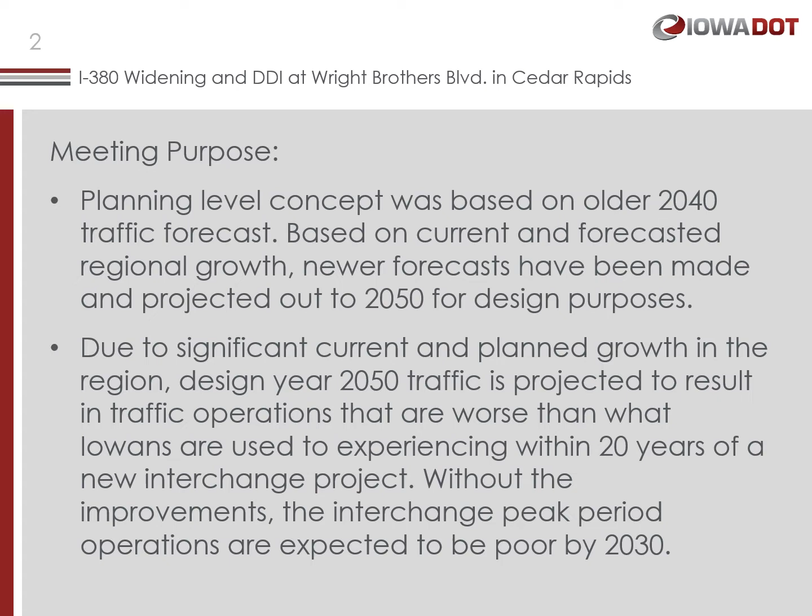This presentation will provide project information, updated traffic forecast information, design reassessment considerations, and recommendations.

Wright Brothers Boulevard interchange with I-380 is proposed to be reconstructed as a diverging diamond interchange, referred to as a DDI for short. For this interchange type, side road traffic crosses to the left side of the road at signalized intersections. DDIs decrease vehicle conflict points by almost half and remove left turns across oncoming traffic. A DDI can increase interchange capacity, efficiency, and safety.

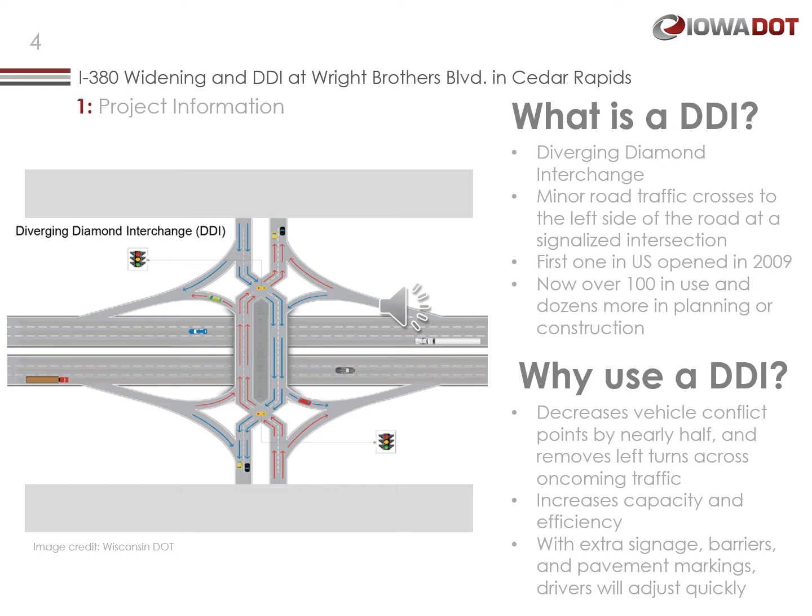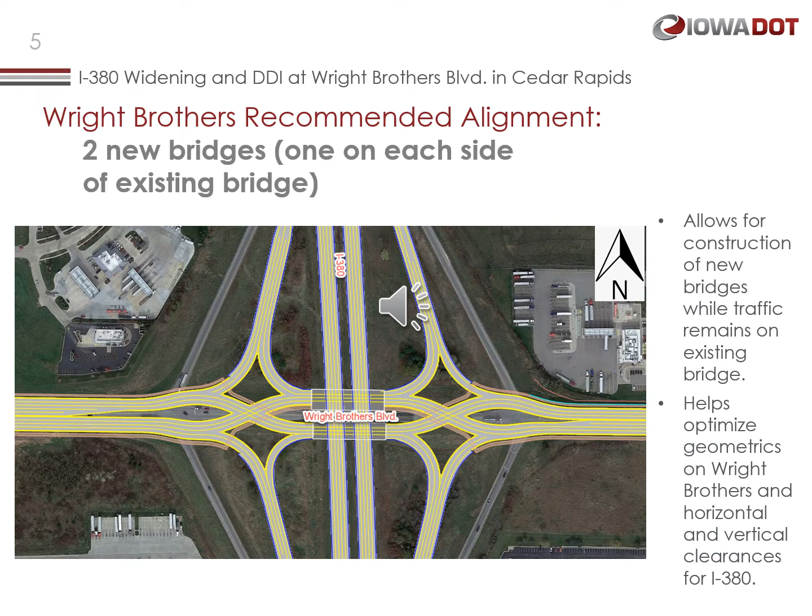The proposed new DDI at Wright Brothers Boulevard over I-380 will have two new bridges. They will be constructed on each side of the existing bridge to help maintain existing traffic during construction. Once the new bridges are ready, the old bridge will be removed.

Due to new and projected industrial, commercial, and housing developments in the region, in 2021 the City of Cedar Rapids facilitated a Southwest area traffic study to reassess future transportation needs.

In the fall of 2021, the city worked with the DOT on an update to the regional traffic model that includes sections of I-380 and Wright Brothers Boulevard Southwest. The design year for the I-380 and Wright Brothers Boulevard interchange improvements was selected to be 2050. Traffic projections were made out to this design year.

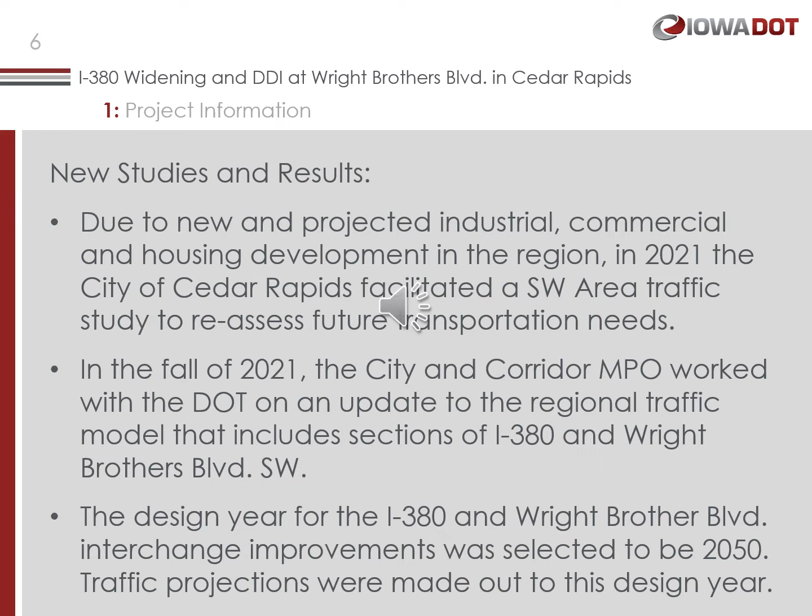The new traffic forecasts show more aggressive traffic growth at the Wright Brothers Boulevard interchange than the prior forecast, larger than what Iowans are used to seeing. The new traffic forecasts justify additional lanes in the interchange and auxiliary lanes on I-380 in many locations between 120th Street and US 30.

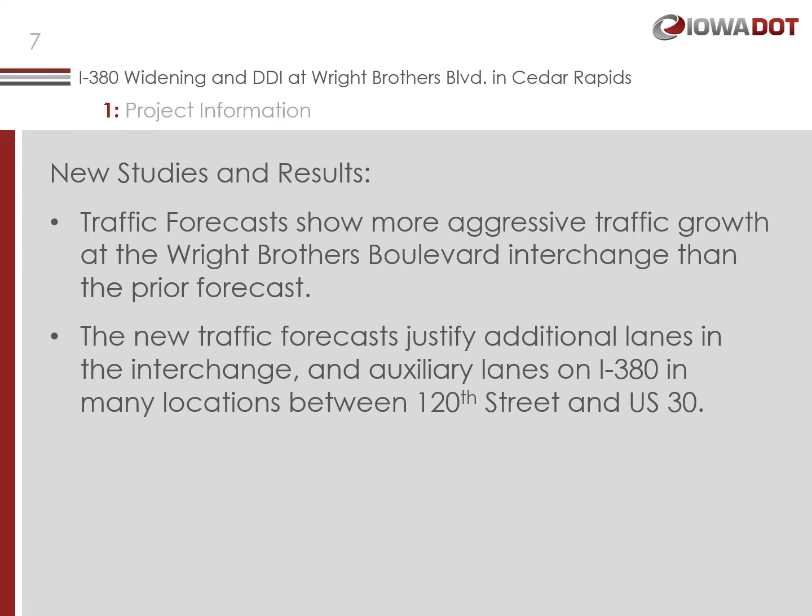The projected operations in year 2050 show congestion along Wright Brothers Boulevard Southwest and along I-380, mostly in the northbound direction between Wright Brothers Boulevard and US 30. Compared to doing nothing at the Wright Brothers Boulevard interchange, which means keeping the existing two-lane bridge over I-380 and the existing ramps, the proposed interchange improvements move the congested operations out approximately 20 years, from 2030 to 2050.

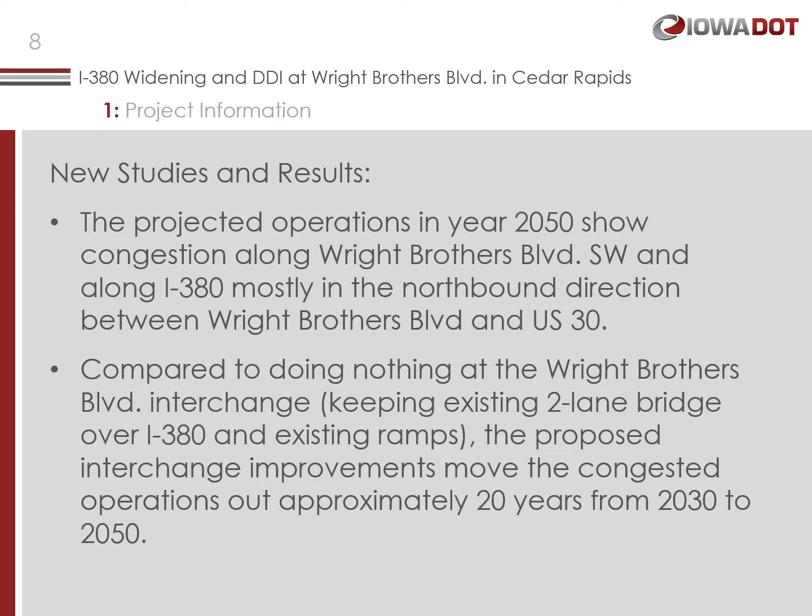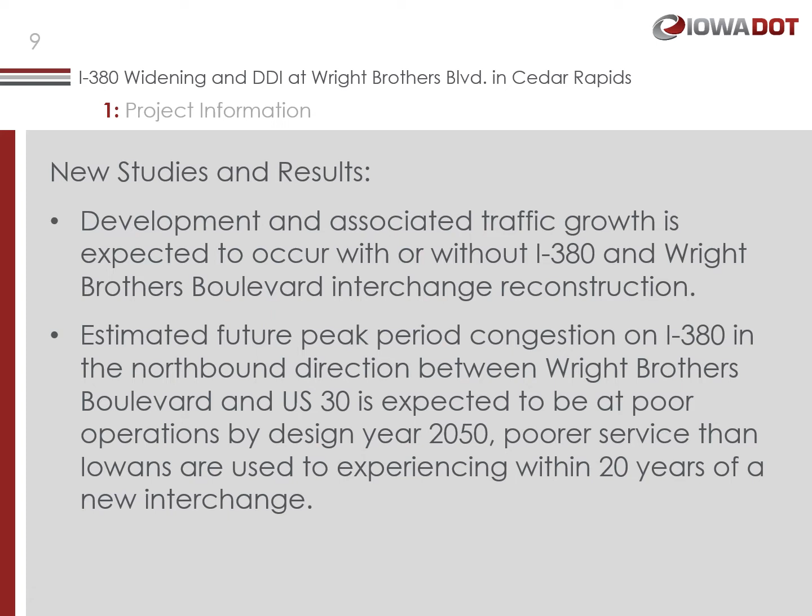Development and associated traffic growth is expected to occur with or without I-380 and Wright Brothers Boulevard interchange reconstruction. Estimated future peak period congestion on I-380 in the northbound direction between Wright Brothers Boulevard and US 30 is expected to be at poor operations by design year 2050, poorer service than Iowans are used to experiencing within 20 years of a new interchange.

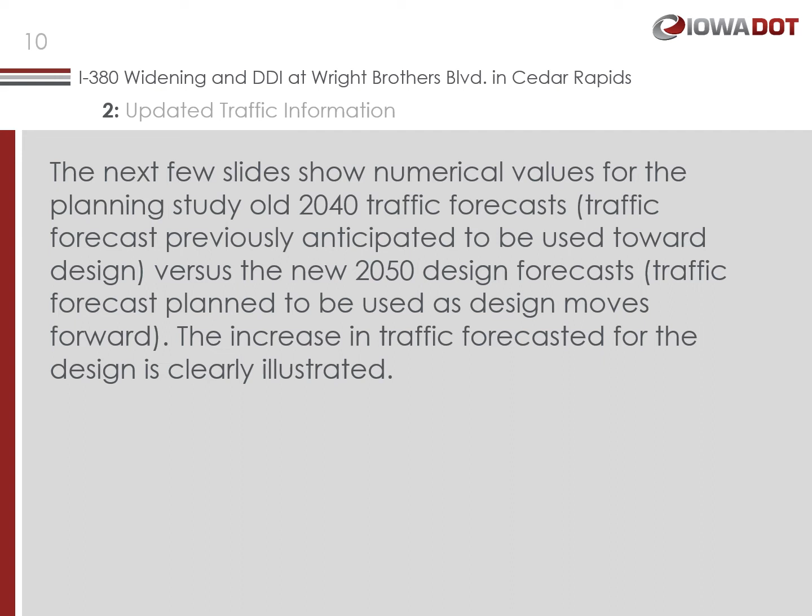Average annual daily traffic, AADT for short, estimates in new design year 2050 are much higher than the prior 2040 planning estimates.

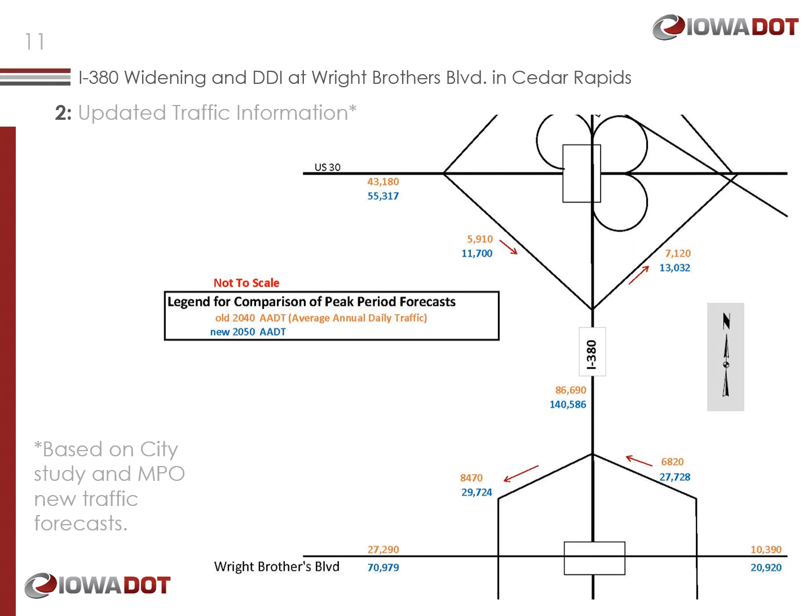AADT is the total for both directions of travel. For example, on I-380 between Wright Brothers Boulevard and US 30, the new 2050 design AADT is 140,586 vehicles, whereas the previous 2040 planning level AADT was 86,690 vehicles.

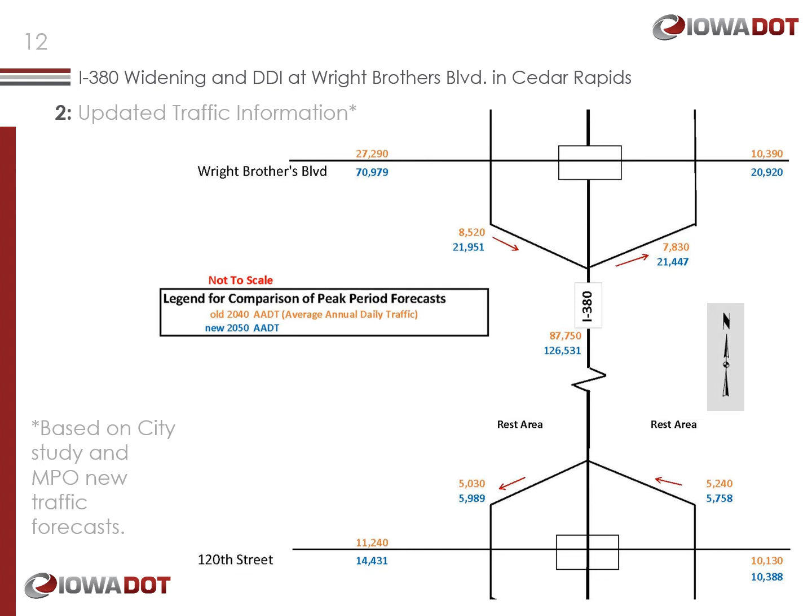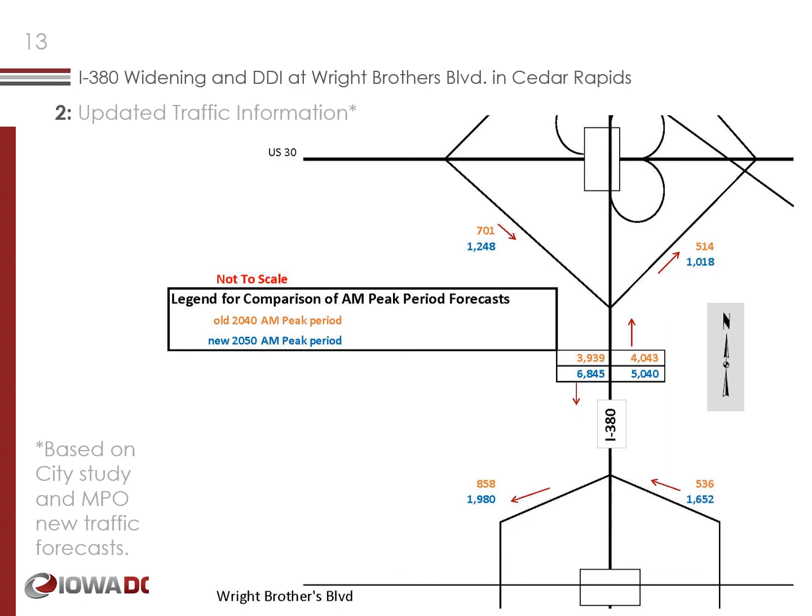Slides 13 and 14 illustrate the AM peak period forecast projections of the old 2040 planning forecast compared to the new 2050 design forecast. Data is shown for each direction of travel. For example, for I-380 northbound between Wright Brothers Boulevard and US 30, the previous 2040 planning peak period forecast was 4,043 vehicles, and the new 2050 design forecast is 5,040 vehicles per hour.

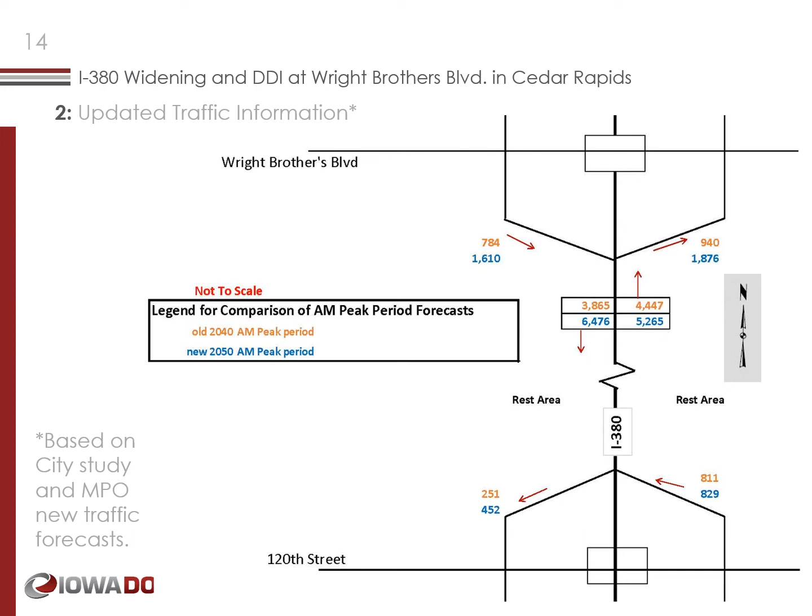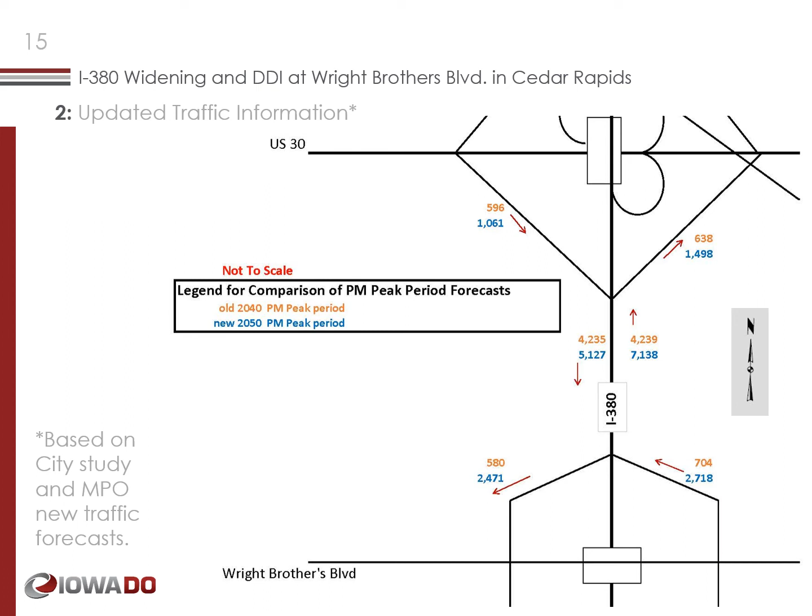Slides 15 and 16 illustrate the PM peak period forecast projections of the old 2040 planning forecast compared to the new 2050 design forecast. Data is shown for each direction of travel. For example, for I-380 northbound between Wright Brothers Boulevard and US 30, the previous 2040 planning peak period forecast was 4,239 vehicles per hour, and the new 2050 design forecast is 7,138 vehicles per hour.

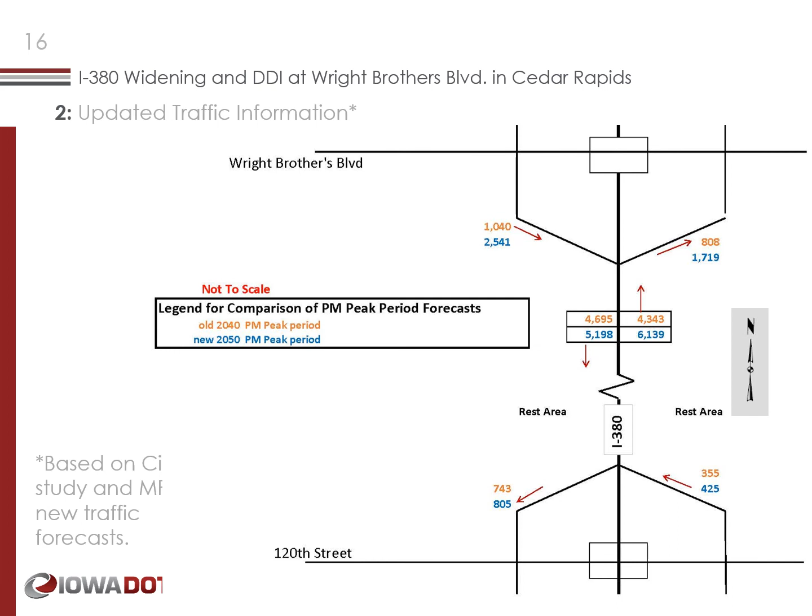I-380 mainline operations were assessed with the new 2050 traffic forecast. Auxiliary lanes were recommended in most locations and are proposed to be added. The following figures illustrate the anticipated speeds and delays along I-380 during peak periods in 2050.

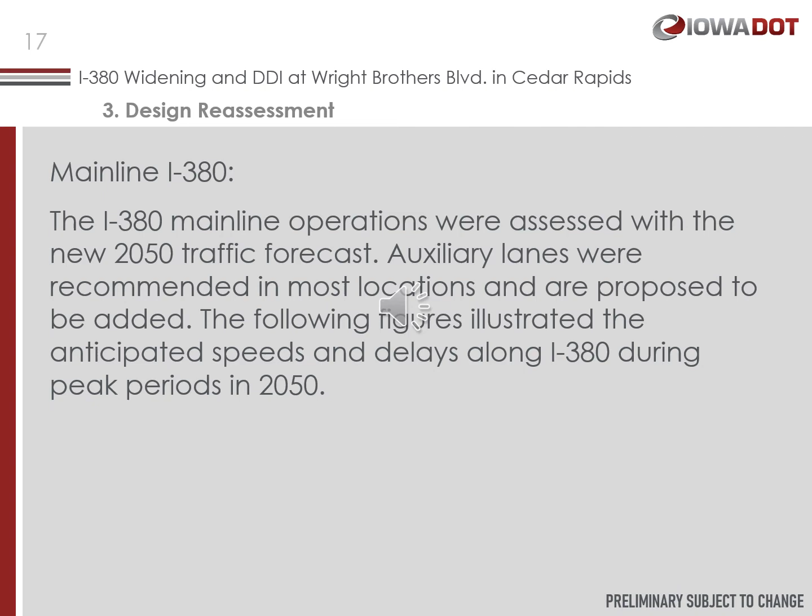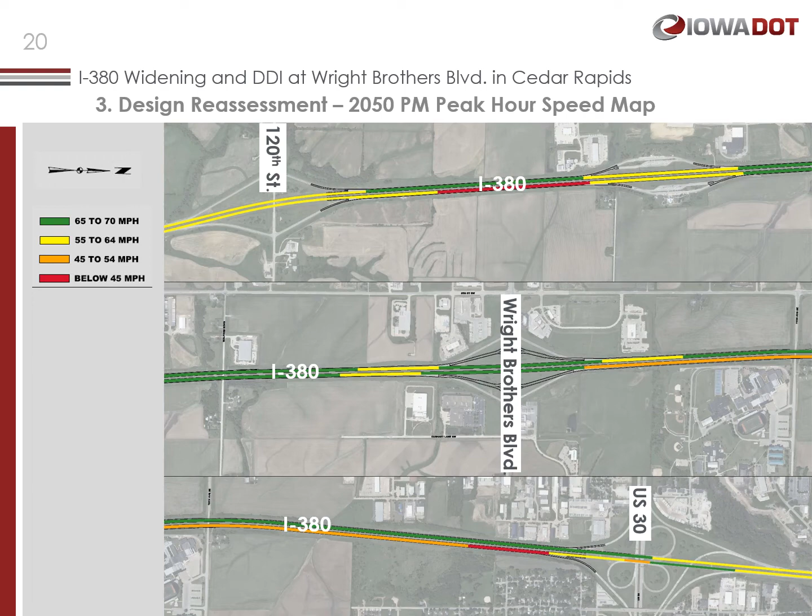This slide illustrates future year 2050 estimated traffic speeds during PM peak hour traffic. The left side of the page illustrates travel time along sections of I-380 during the AM peak hour if no improvements are made. The right side illustrates travel times along I-380 with the proposed improvements.

The left side of the page illustrates travel time along sections of I-380 during the PM peak hour if no improvements are made. The right side illustrates travel times along I-380 with the proposed improvements.

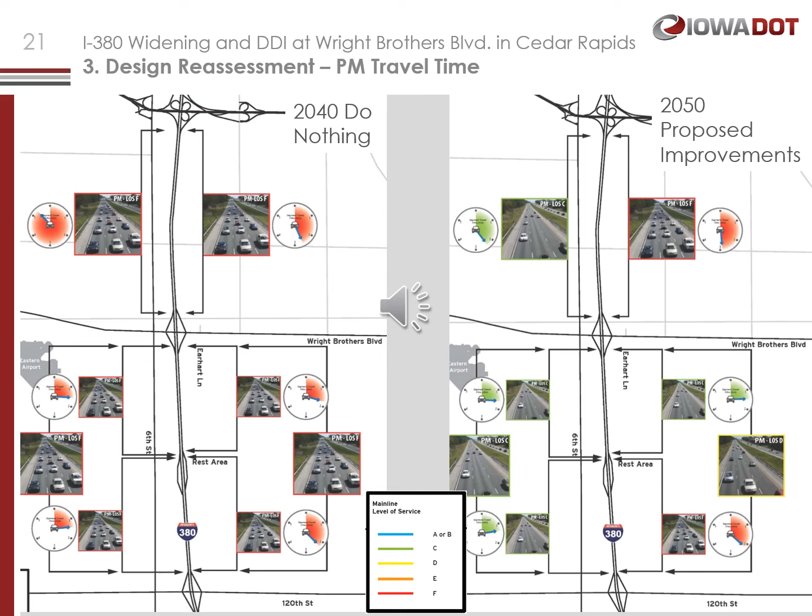With the new traffic forecast showing much greater traffic for the new selected 2050 design year, the interchange type and geometrics were reassessed. The next two figures illustrate changes made between the planning concept that used the old 2040 traffic forecast and the current design concept that uses the new 2050 traffic forecast.

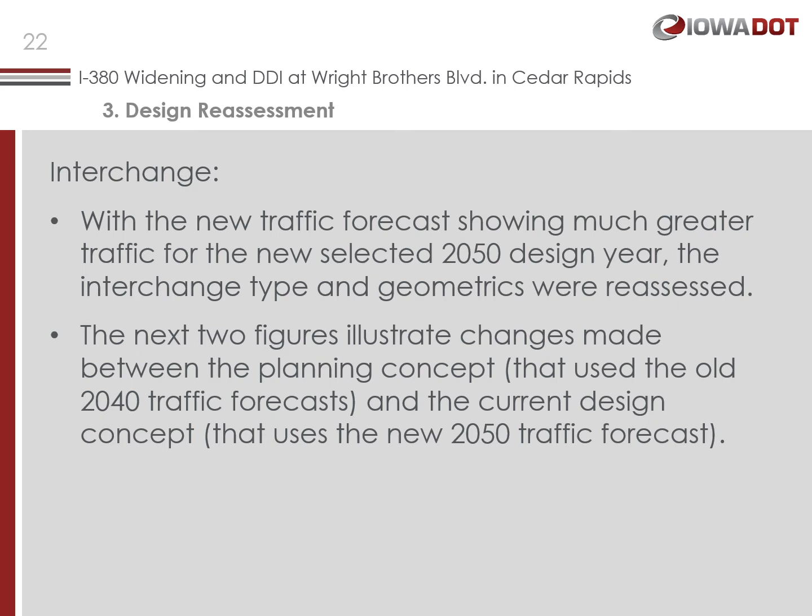Prior planning level concept layout of the DDI. Note 4 through lanes on Wright Brothers Boulevard.

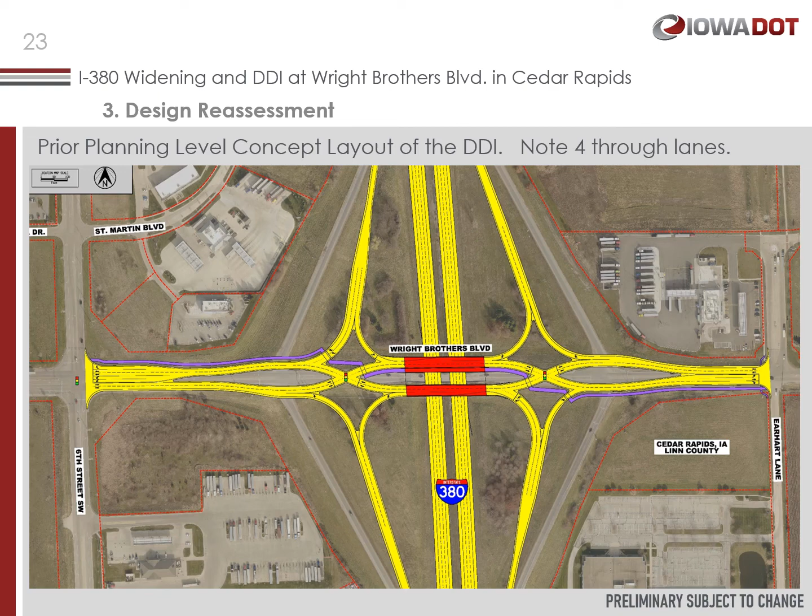Present design level concept layout of the DDI showing 6 proposed through lanes on Wright Brothers Boulevard, additional turning lanes, and additional ramp capacity.

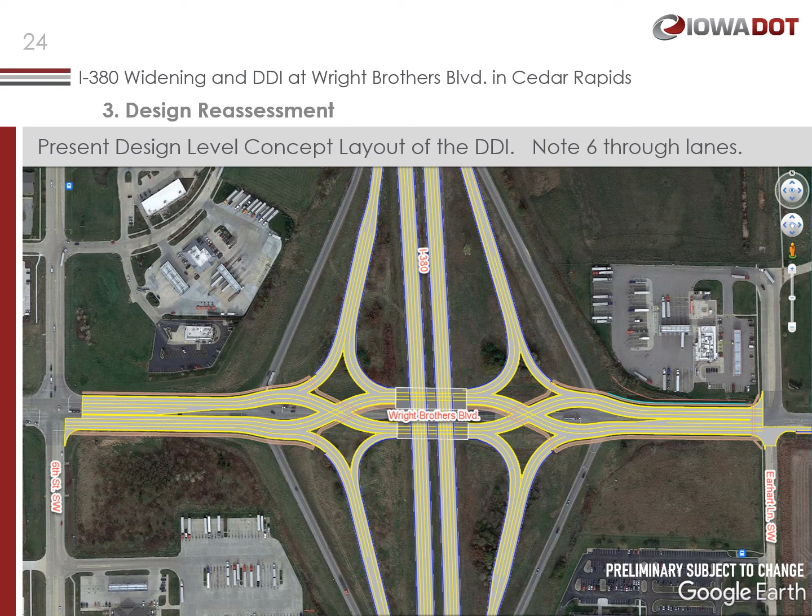The projected 2050 operations along Wright Brothers Boulevard Southwest show congestion in the peak periods and indicate that several signal cycles may be required for drivers to get through the traffic signals during these periods.

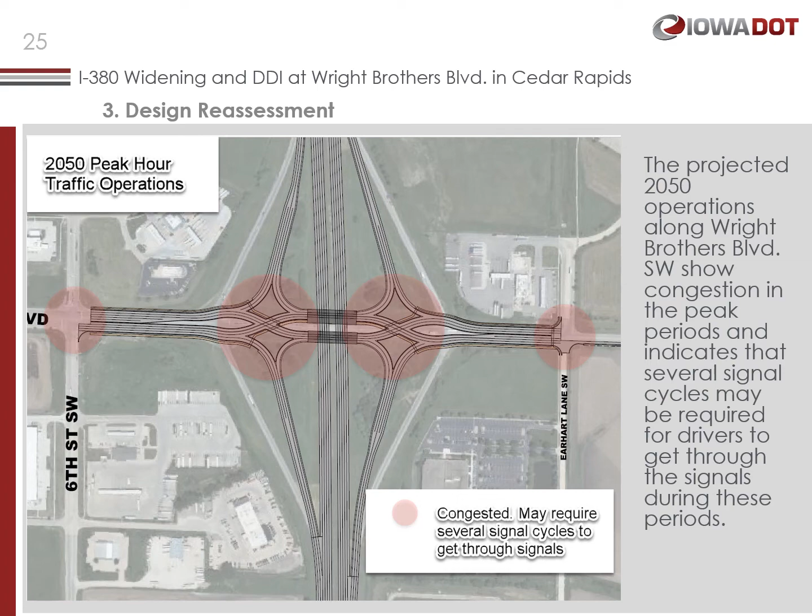As part of the interchange reassessment, after noting the 2050 design year traffic operations may not meet Iowa driver expectations, the DOT and the city looked at a couple higher capacity interchange options for this location.

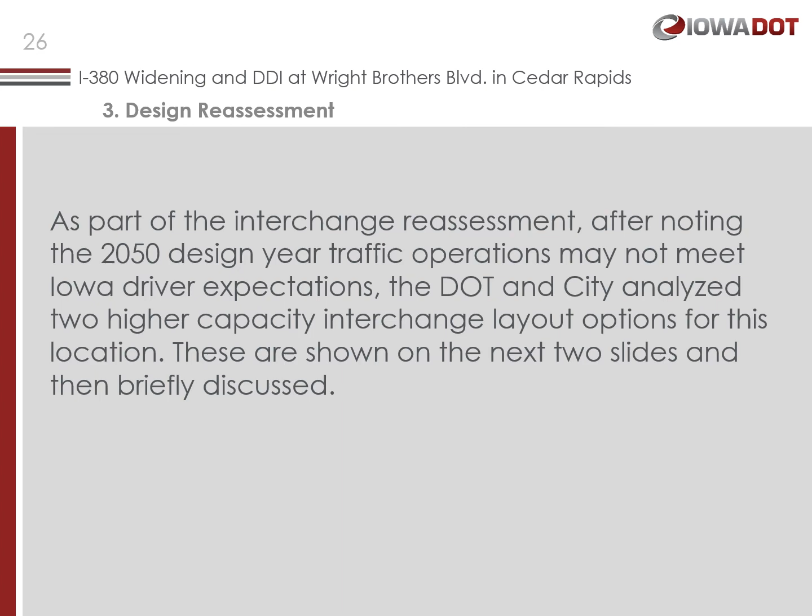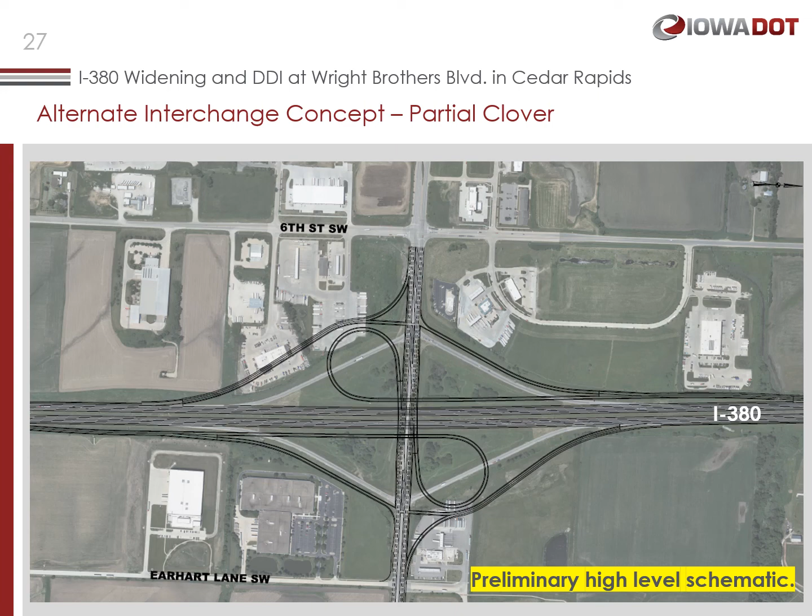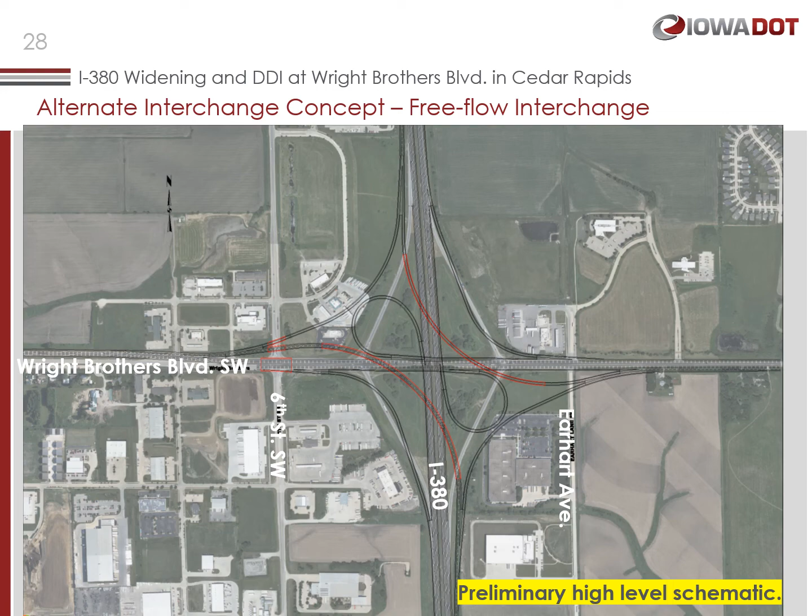The two higher capacity interchanges illustrated on the prior slides would result in severing 6th Street and Earhart Lane and would result in undesired local traffic impacts. The two higher capacity interchanges would severely affect adjacent businesses.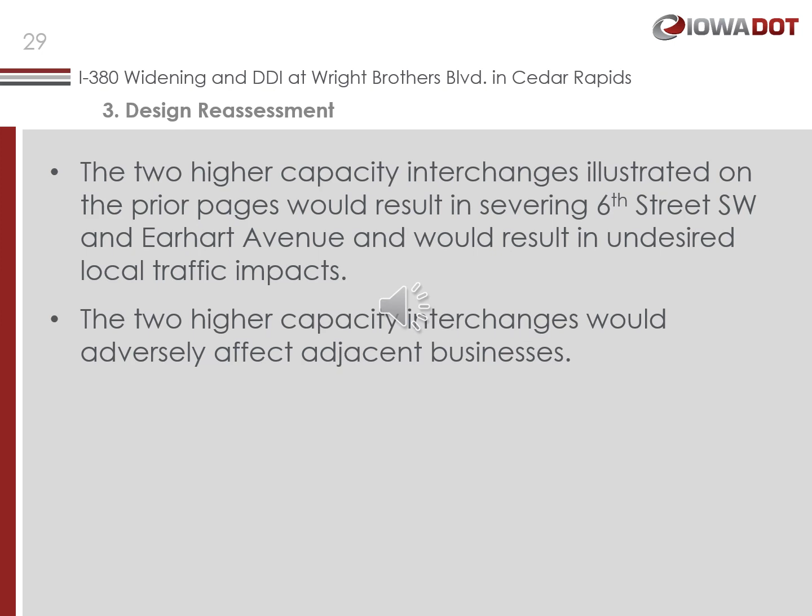The DOT and City recommend continuing with the DDI 2050 design concept and adding the additional through lanes, turning lanes, and ramp capacity on Wright Brothers Boulevard, and adding auxiliary lanes in most locations along I-380 between 120th Street and US 30. The DOT and the City understand that forecasted traffic may result in undesirable operations by design year 2050, even with the proposed improvements. The DOT will work with the City of Cedar Rapids on future mitigation strategies should this become very concerning.